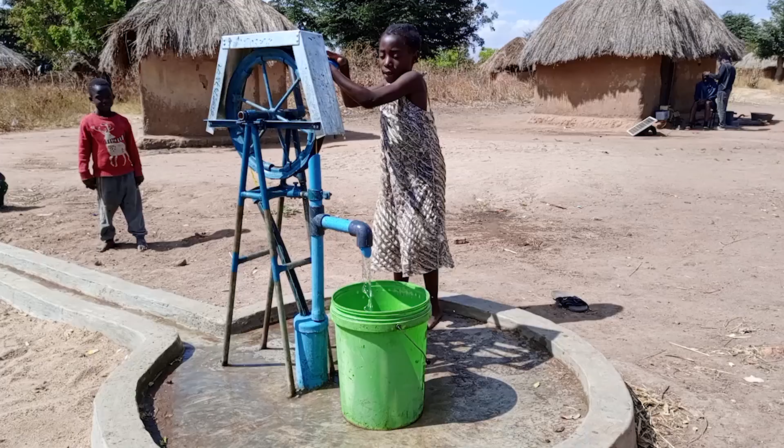This is a step-by-step tutorial on how to make a rope pump Model 1. For the production of the rope pump, the following workshop equipment and tools are recommended. For power tools you need an electric welding machine, angle grinder, and hand drilling machine.

This is an indication of the hand tools you need for construction of the rope pump. You can find the full list of hand tools in the construction manual at jacana.help/resources/water. For measuring tools, you need measuring tape, tri-square, ruler, scriber, and permanent markers.

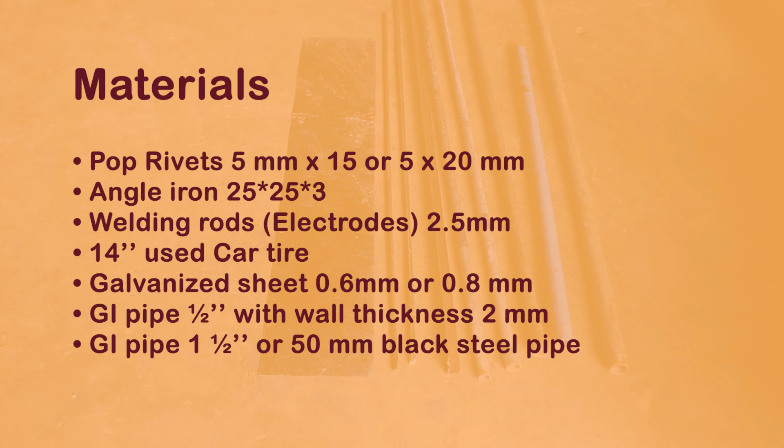This is a list of consumable materials you need. This is an indication of the materials needed for the construction of the rope pump. You can find the full list of construction materials in the construction manual at jacana.help/resources/water. To make good quality rope pumps and to produce faster, it is recommended to use production jigs.

To make a jig, first, make a part and then use that part to make the jig. This video assumes the jigs are produced. The pump structure is made with galvanized pipes to reduce corrosion. Some pipe ends must be squeezed to make welding easier. Follow the steps on how to make a pump structure.

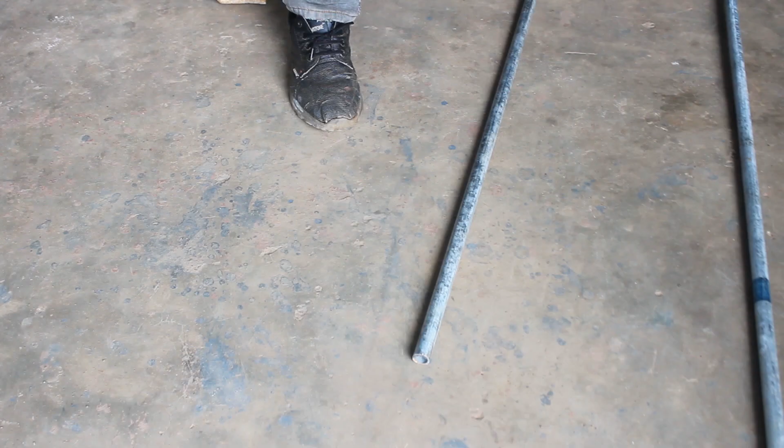Using half-inch galvanized pipe with a 2 mm wall thickness, cut 4 pieces of 950 mm length. It is advised to fix parts in a vise when cutting using an angle grinder. Using half-inch galvanized pipe with 2 mm wall thickness, cut 4 pieces of 180 mm and 2 pieces of 120 mm.

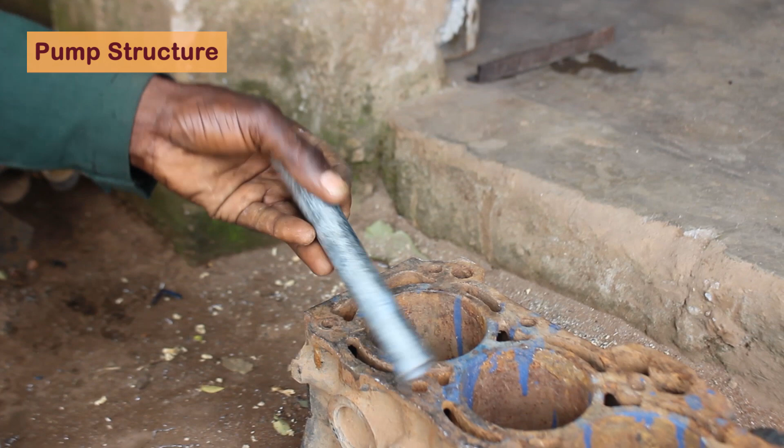Take the 4 pieces of half-inch galvanized pipes, 180 mm, 120 mm length, and hammer on both ends. Some pipe ends need to be squeezed to make welding easier. Take the 4 cut half-inch galvanized pipes of 950 mm length and make one end flat with a heavy hammer. Mark bending and drilling points using jig number 6.

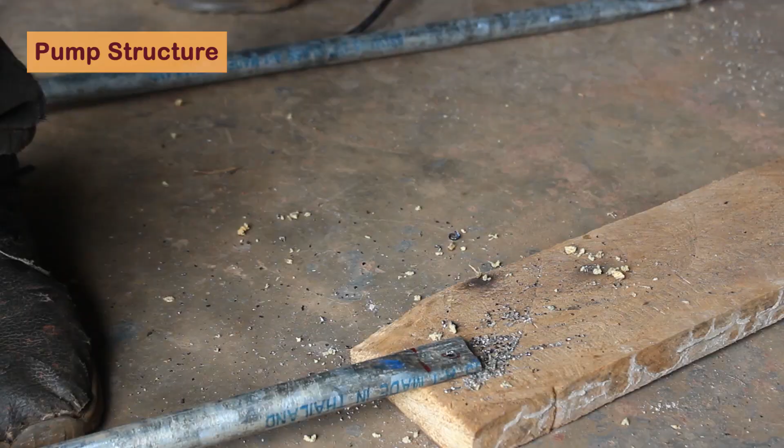Drill holes at distance of 15 mm from the end. First drill with 6 mm, then with 11 mm. Put the flat end of 35 mm in a strong vise and bend at 85 degrees.

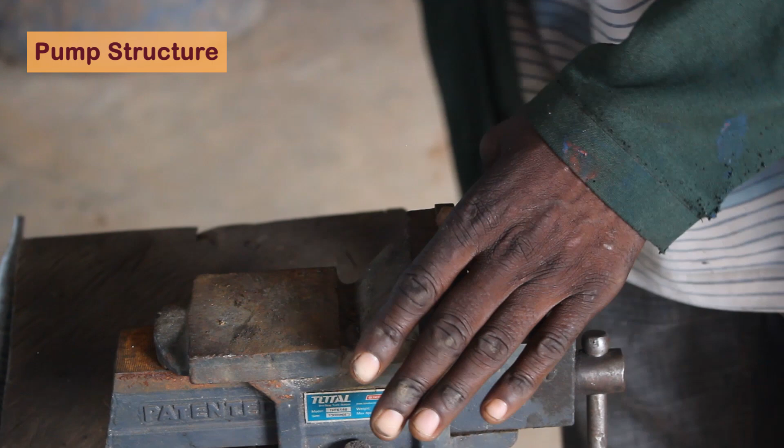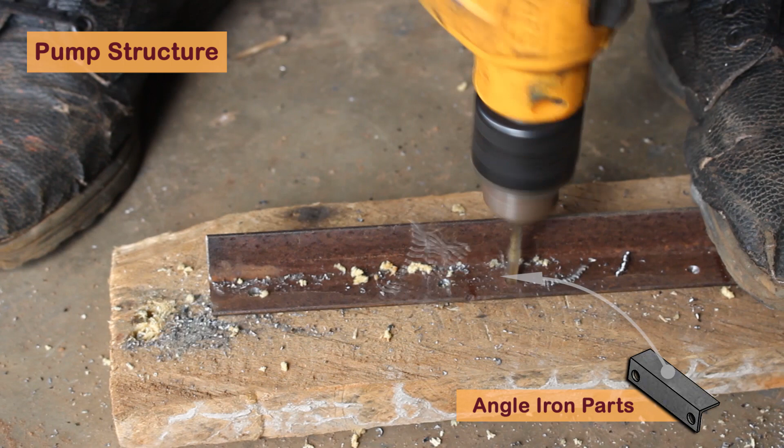Prepare the angle iron parts, drill holes in the 2 parts. Use angle profile 25 mm by 25 mm by 3 mm. It is advised to fix parts in a vise when cutting using an angle grinder.

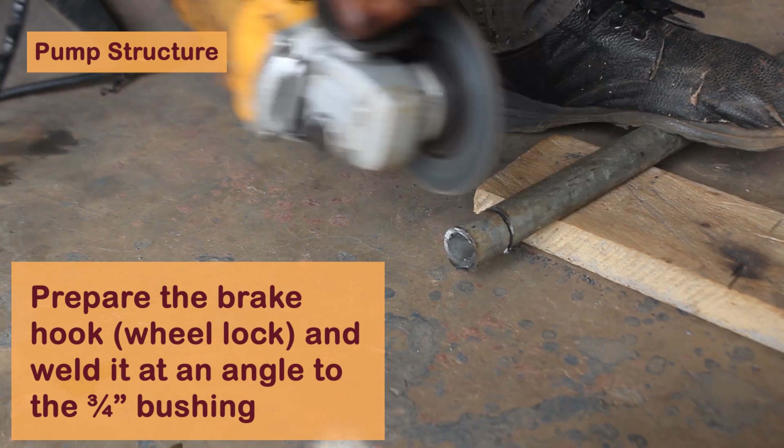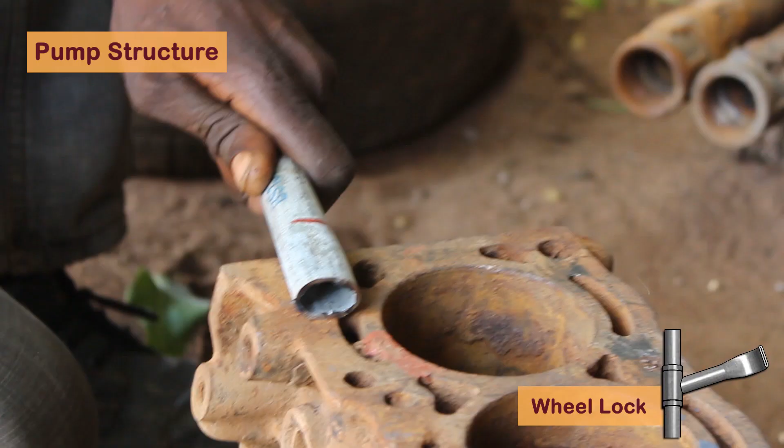Prepare the brake hook (wheel lock) and weld it at an angle to the 3/4 bushing. For the brake hook bushings, use 3/4 GI pipe with a wall thickness of 2.5 millimeters. Mark the bending point for the hook. Then hammer and make a hook.

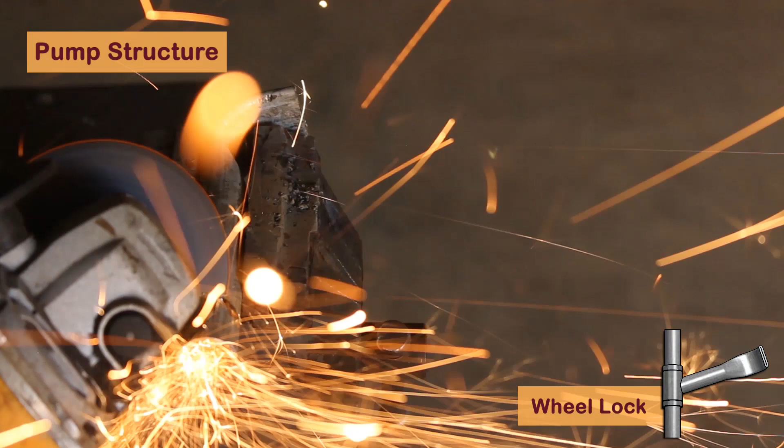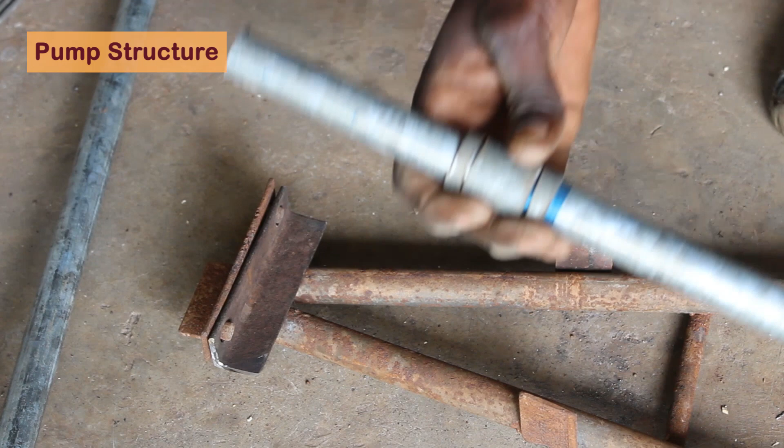Then mount the brake hook bushings to one leg. Make sure the brake hook bushings are in the right leg. Place parts in the first welding jig number 8. Tack weld the parts in place together with the angle iron part.

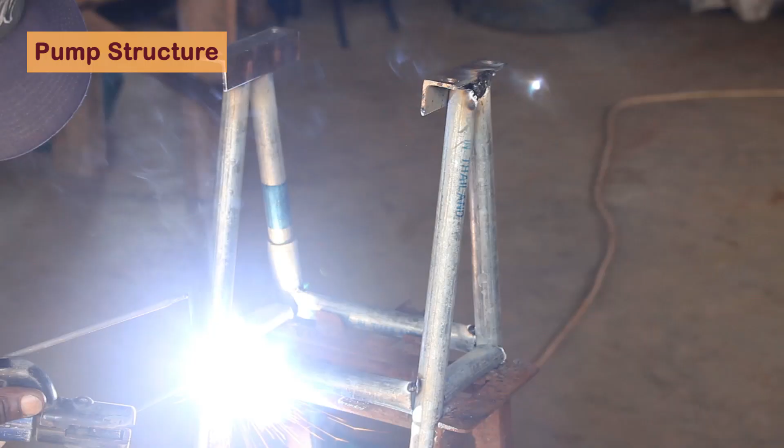Place the two sides in jig number 9 and weld all parts together with tack welds. Prepare the discharge pipe holder using 1/2 inch, 3/4 inch, and 1½ inch galvanized pipes. Prepare the first piece using 3/4 galvanized pipe with a wall thickness of 2.5 millimeters.

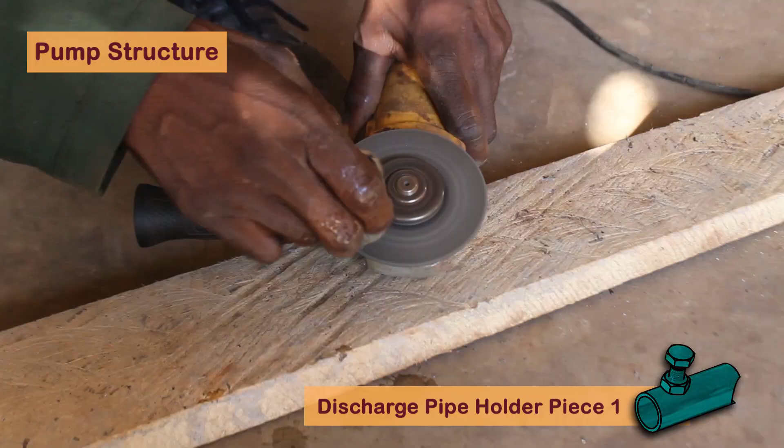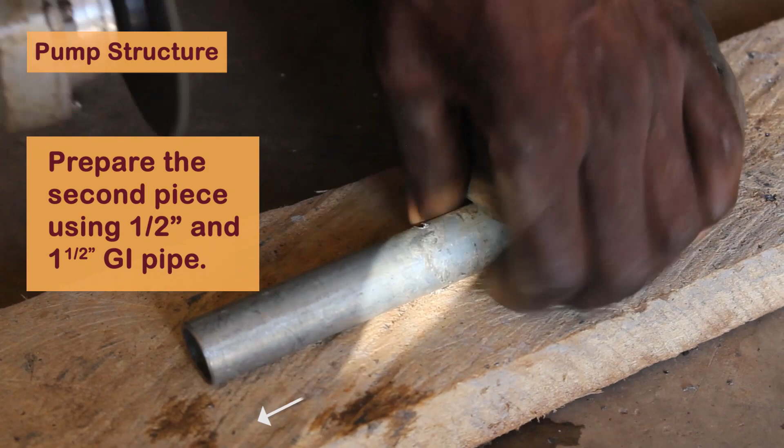Weld 1 M10 nut. Use some grease or oil to avoid bolts getting stuck by welding. Prepare the second piece using 1/2 inch and 1½ inch galvanized pipe. Use 40 mm black steel pipe with a wall thickness of 2.5 millimeters.

Prepare a 30 mm length return pipe holder using 1 1/4 steel pipe with 2.5 mm wall thickness. Tack weld the discharge pipe holder piece 1 to the pump structure.

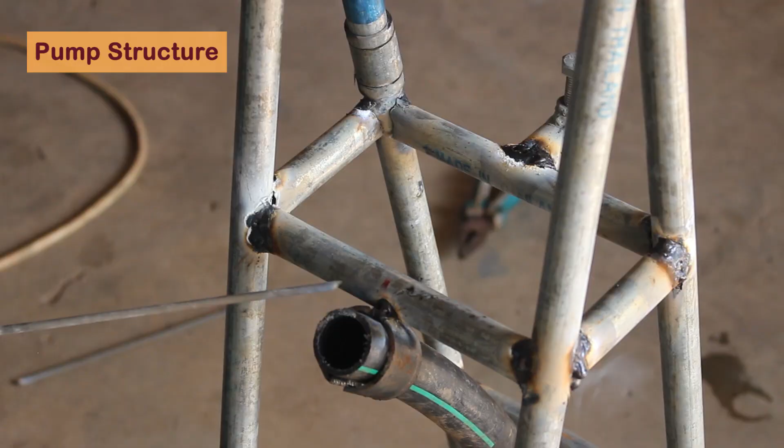Tack weld the discharge pipe holder to the pump structure. Prepare 2 angle iron parts for the cover support and drill holes for the pop rivets. Use 25 mm by 25 mm with 3 mm thickness angle iron.

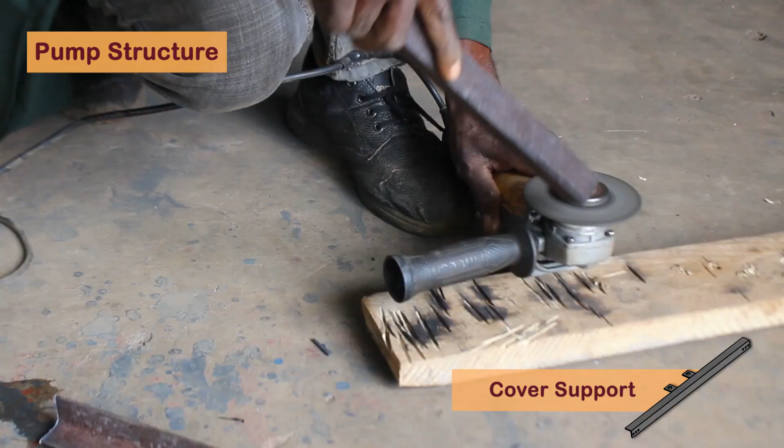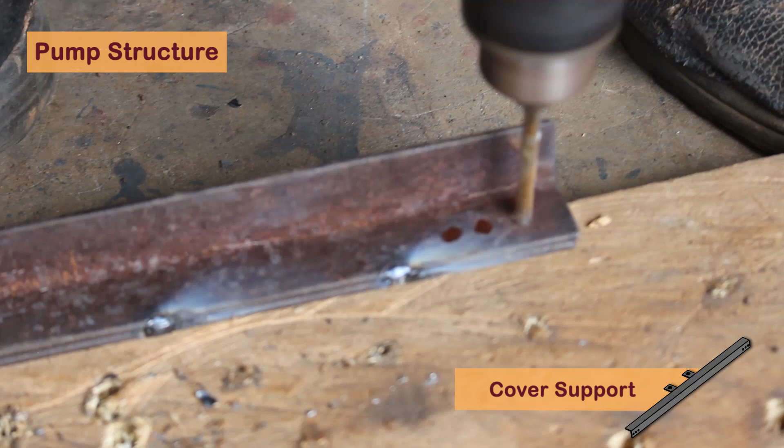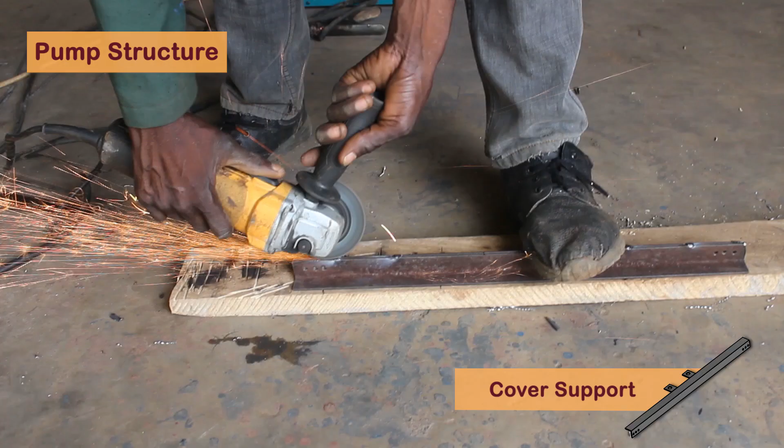Temporarily, weld the pieces together for easy drilling of holes for pop rivets. Mark and drill holes for pop rivet using a 6 mm drill bit. Weld strips for M10 bolts and nuts.

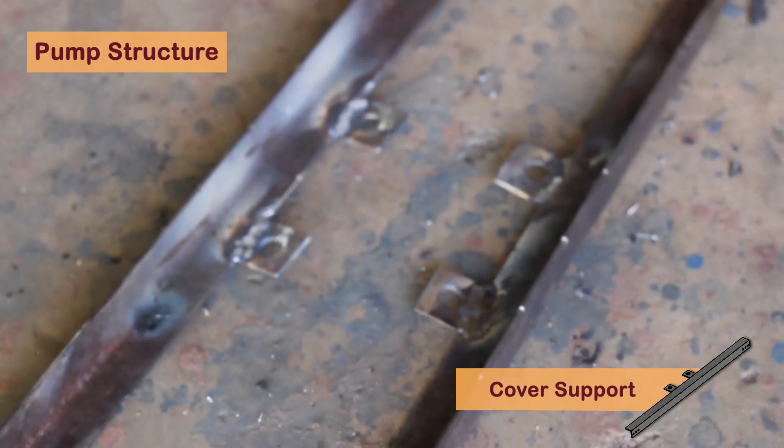The handle transfers the human power to the wheel. Due to the changing forces, the handle can break easily when poorly made or when inferior materials are used. Follow the steps on how to make a handle. Measure and cut a 3/4 galvanized pipe with 2.5 mm wall thickness on the right length.

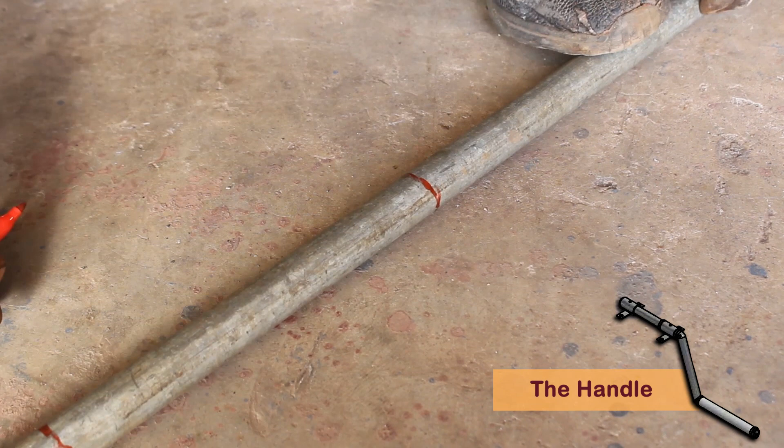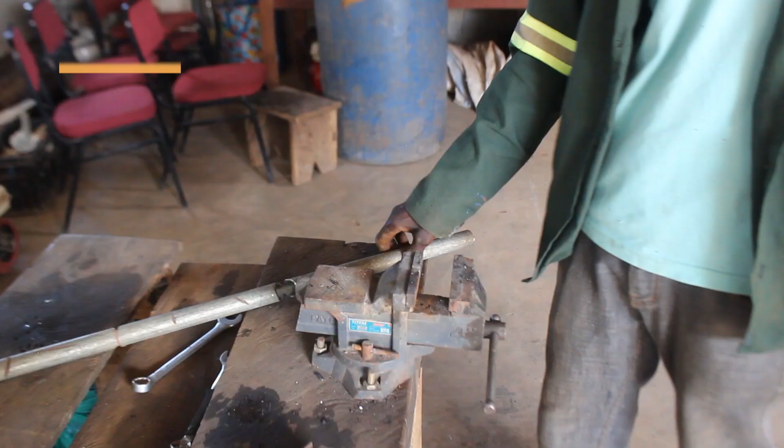Cut slots of 60 degrees where the handle will be bent. Be careful not to cut the pipe completely. Bend the pipe carefully and fit it into jig number 1. Eventually, make some adjustments.

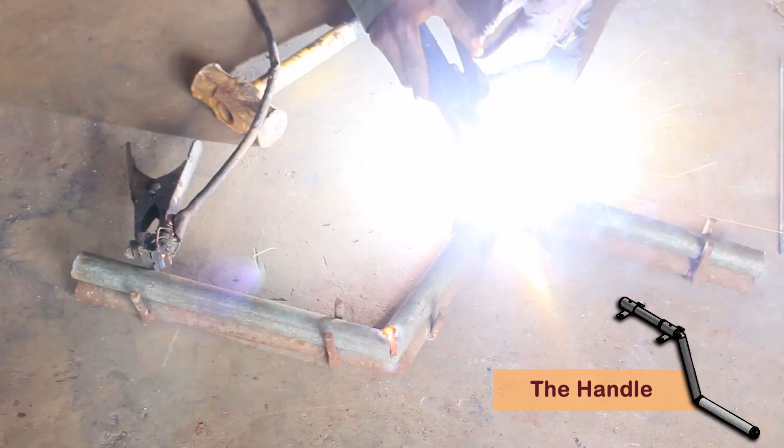Weld the cuts and make sure the cuts are totally closed, and take special care of this weld, as it is a known weak point of the pump. Remove the handle from the jig and weld the other side. The handle can break if the welds are not made well.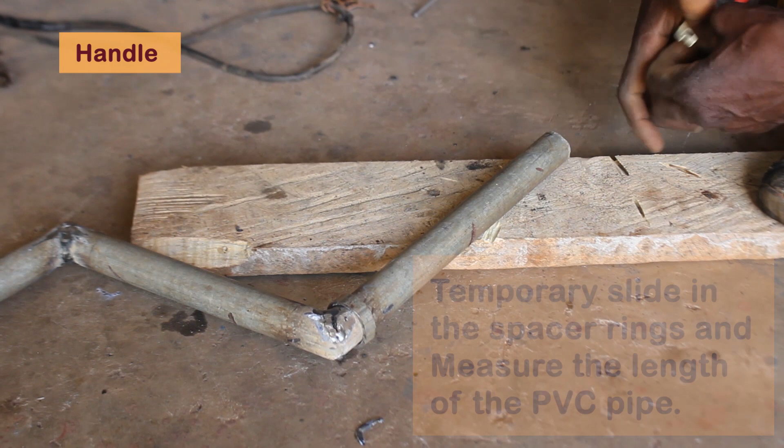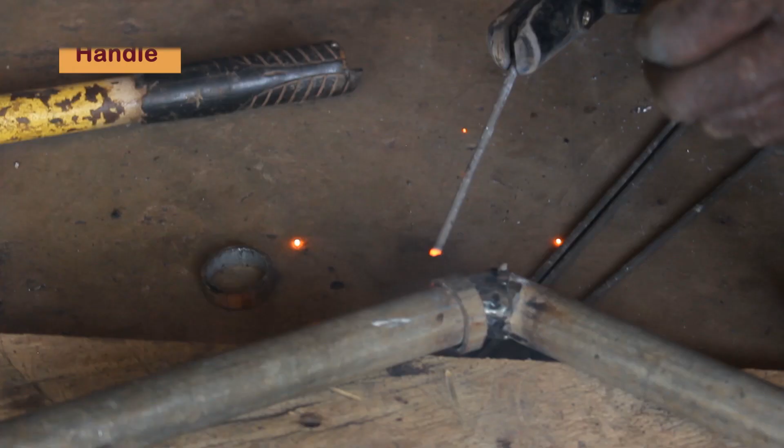Temporarily slide in the spacer rings and measure the length of the PVC pipe. First, slide a 4 mm spacer ring on the handle and spot weld. Then slide the 32 mm PVC pipe over the handle and weld the other ring to lock the PVC in position.

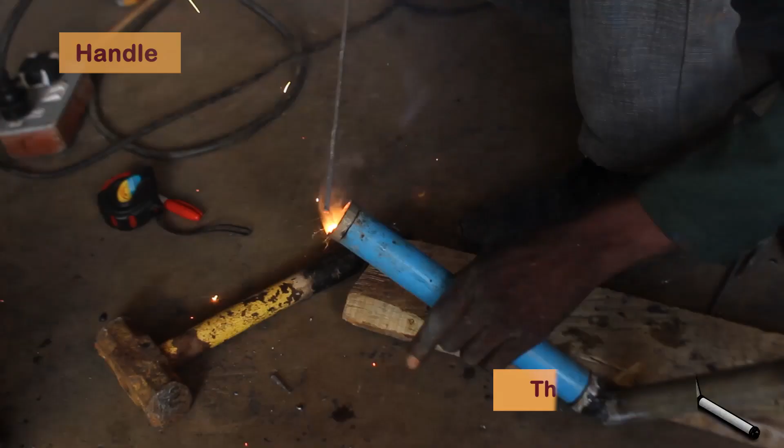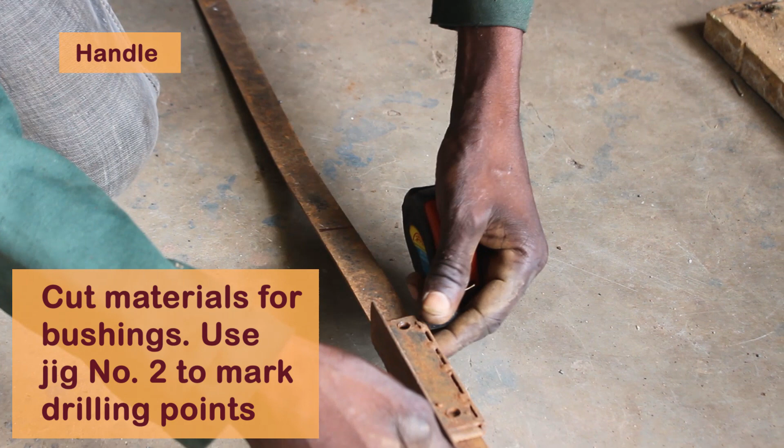Cool the welds with water to avoid burning the PVC pipe. Make sure the PVC pipe is able to rotate. Cut materials for bushings. Use jig number 2 to mark drilling points. Drill holes in strips for bushings. First use 6 mm then 11 mm drill bit.

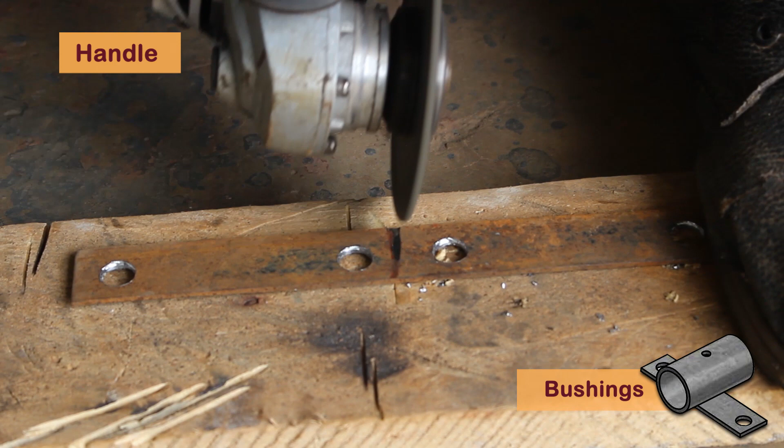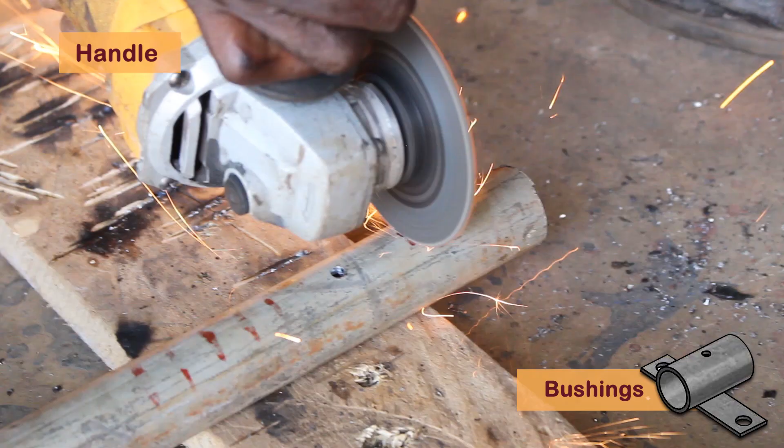Cut 2 pieces of 60 mm length using 1-inch galvanized pipe with a wall thickness of 2.5 mm for the bushings. Drill one hole on top of the bushing using a 6 mm drill bit. It is advised to fix parts in a vise when cutting using an angle grinder.

Weld the bushings to the strips. Mark the center for the bushings on the strip.

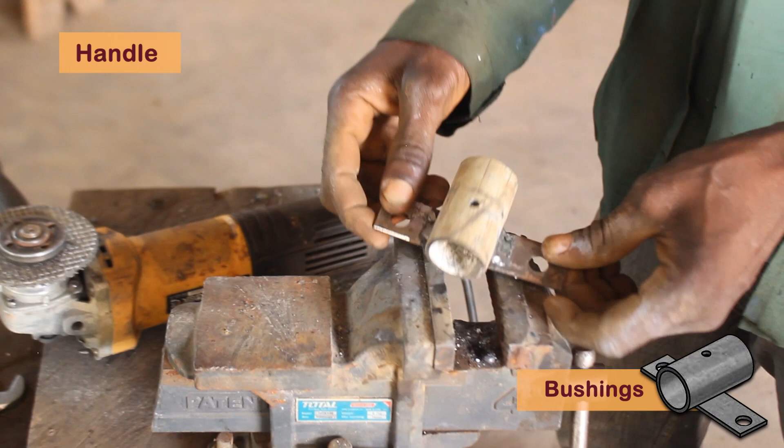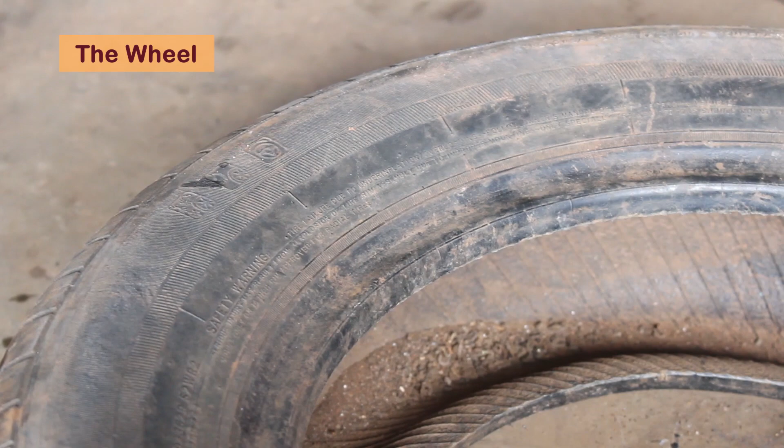Mark the 2 rings with 45mm width using a tool, a compass made of a 6mm round bar. Cut the rubber rings with a short sharp knife. Cutting may be easier by using some water.

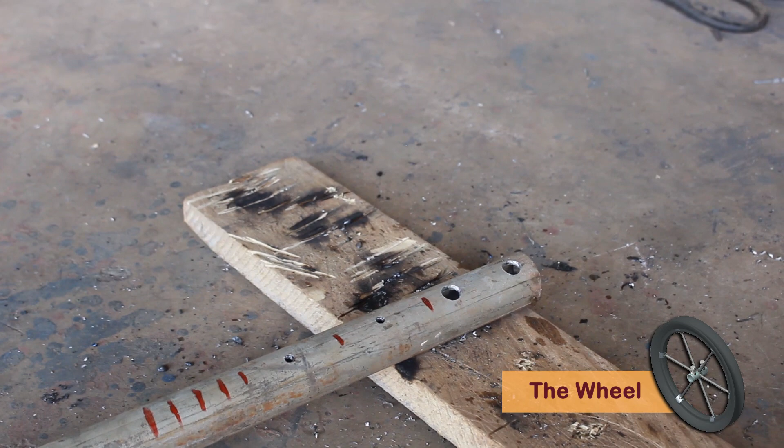Prepare the hub using 1-inch galvanized pipe with a wall thickness of 2.5 mm and drill 2 holes using a 10 mm drill bit. Mount 2 bolts to M10 nuts and weld the nuts to the hub.

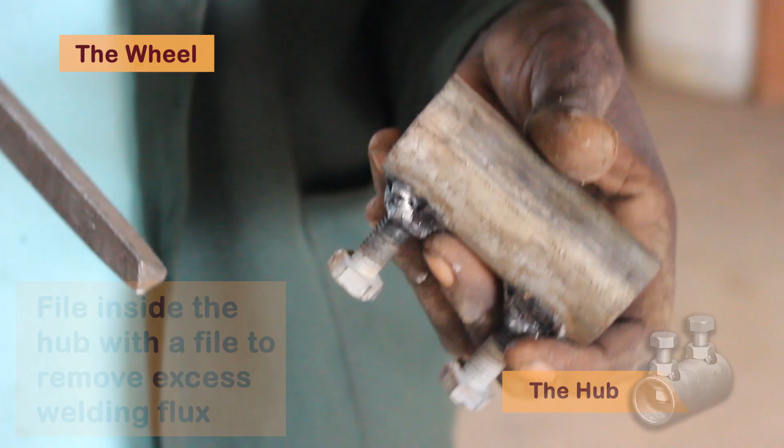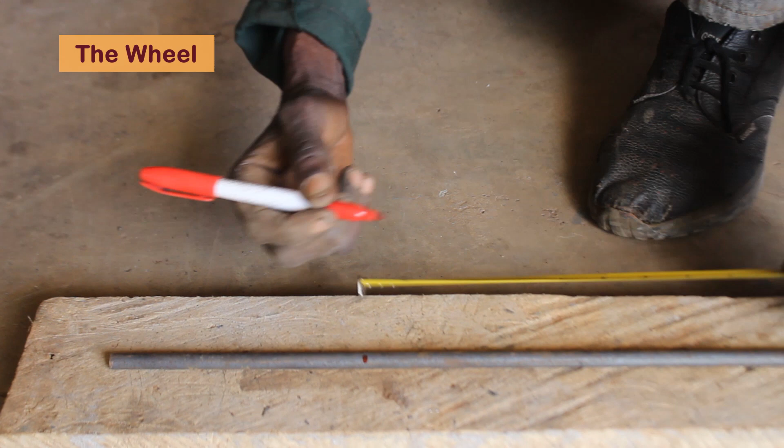File inside the hub with a file to remove excess welding flux. Cut 6 spokes using 10 mm round iron bar. Make the wheel clamps using 3/4 or 1-inch galvanized pipe with 2.5 mm wall thickness.

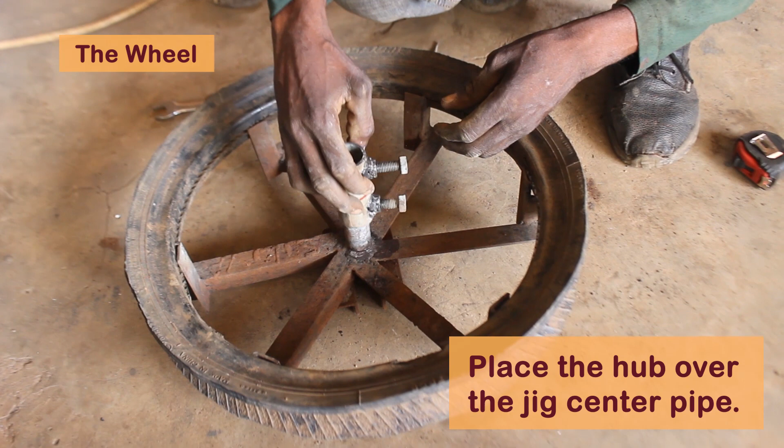Place the 2 tire parts on jig number 4. Place the 6 clamps over the tire rings. Place the hub over the jig center pipe. Screw old bolts into the nuts of the hub to protect the screw threads while welding and tighten them to secure the hub.

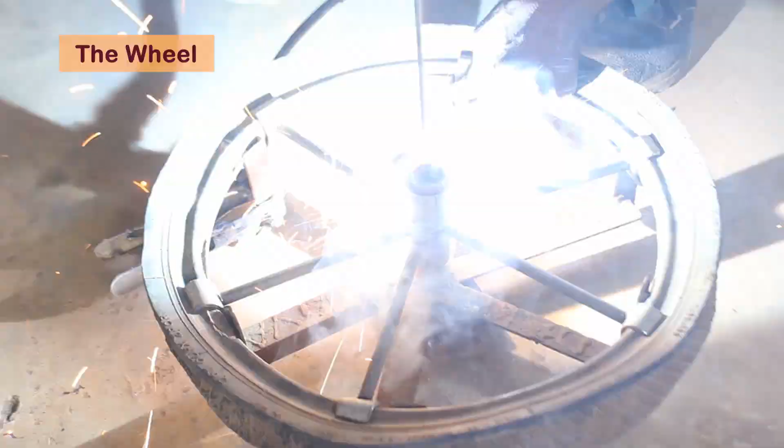Clamp the 6 spokes between the clamp and hub. Weld the spokes onto the hub. Do this only with spot welding so the spokes can be adjusted. Weld the spokes on one side onto the tire clamps. Cool the clamp directly after each weld with a small bottle with a hole in the cap, to avoid burning the rubber.

Separate the wheel carefully from the welding jig. Reinforce the wheel with more clamps. Then adjust the clamps.

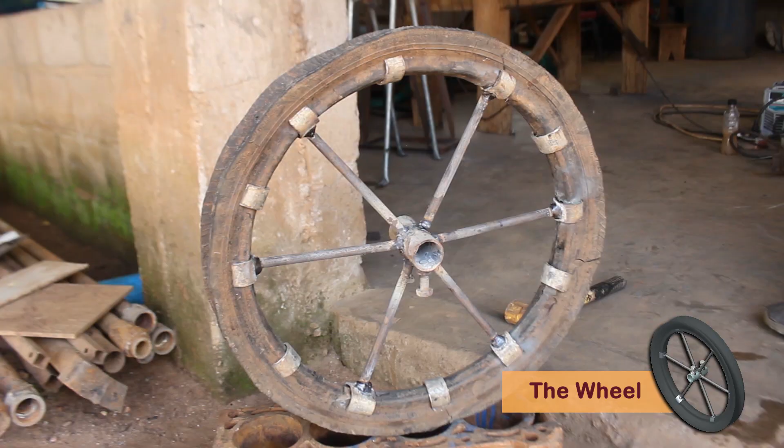The cover prevents water from splashing from the rope and also protects the rope from direct sunlight, as the lifespan of the rope will be reduced when exposed to direct sunlight. The wheel cover consists of 0.6 mm galvanized sheet metal. Before cutting, calculate and mark the most effective layout of the large metal sheet. Here are the steps to make the cover.

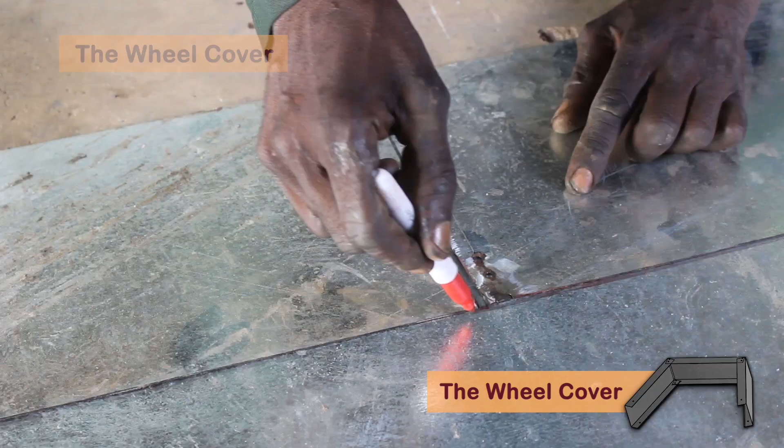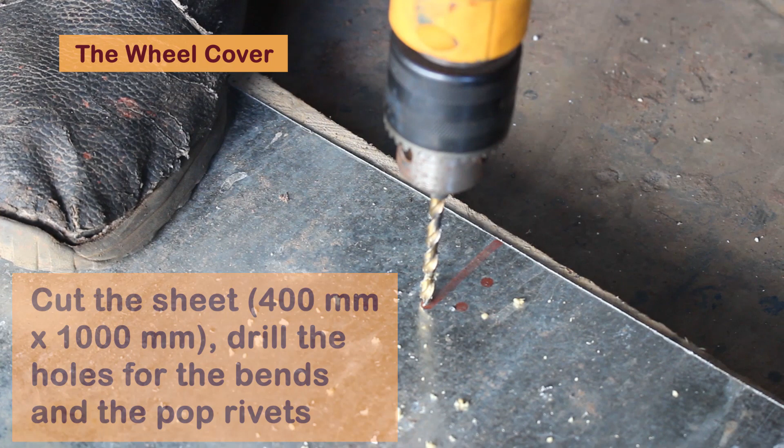Use the jig number 5 and mark the sides, holes, and position of the folding lines for the bending. Cut the sheet 400 mm by 1000 mm. Drill the holes for the bends and the pop rivets. Drill 4 holes that prevent cracks when bending the cover and make the cuts.

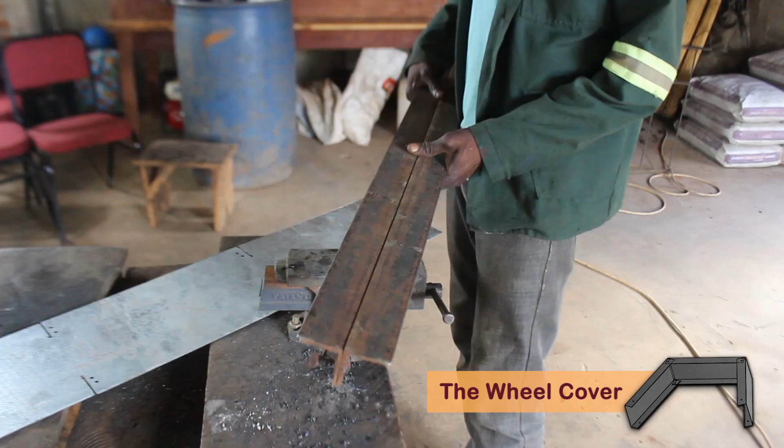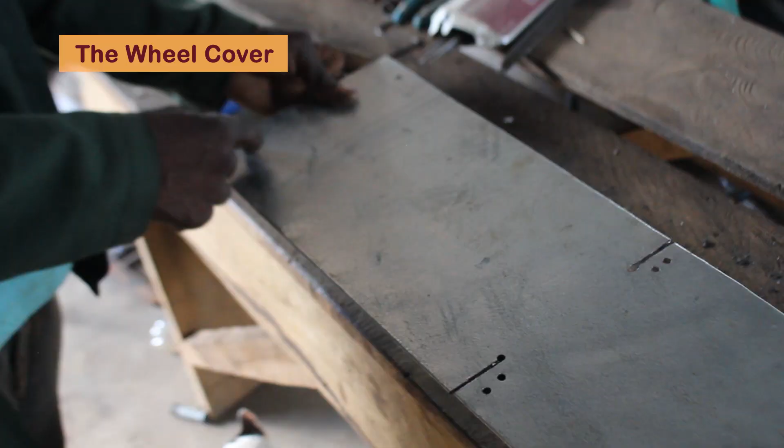Bend the 2 long sides of the cover at 7 mm. Then bend the rest of the cover in the right shape using jig number 10. Use a piece of wood and a hammer to avoid deforming the sheet.

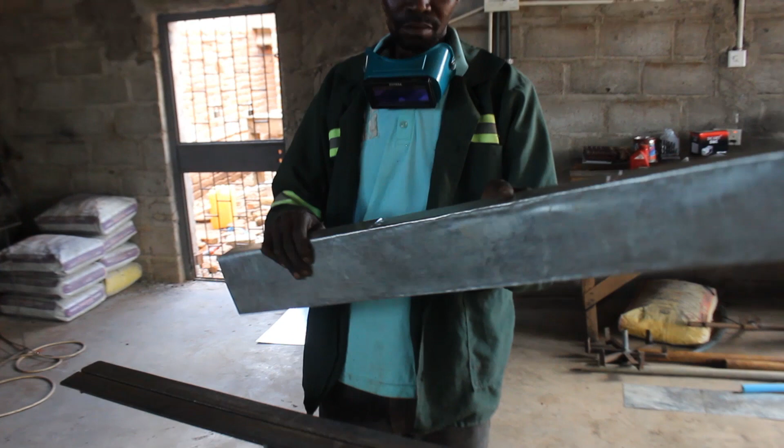The guide box guides the rope at the bottom of the well, where the rope and pistons make a turn. It has an inlet pipe with a trumpet to guide the rope coming down into the well and is fixed to the rising main. Follow the steps on how to make a guide box. Cut 2 pieces of 150 mm length using 1/2 inch galvanized pipe with 2 mm wall thickness and hammer to make them a bit flat.

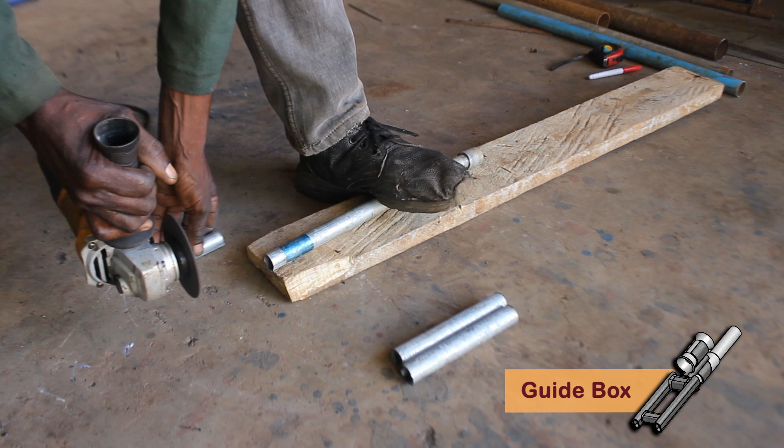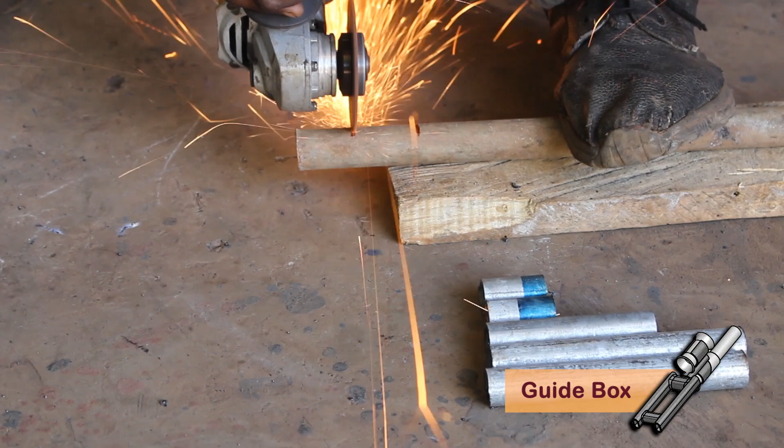Then cut 2 pieces of 40 mm length using 3/4 galvanized pipe with 2.5 mm wall thickness for the rising main and return pipe. Hammer to make them a bit flat.

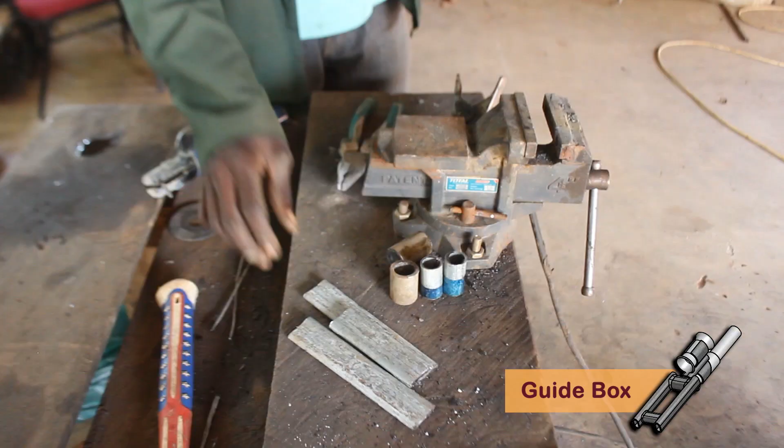Assemble all the parts together and weld. Make sure the welding is smooth on the bottom of the guide box to avoid damaging the rope when rotating. If possible, sand the guide box. Cut a 30 degree angle at the top of the 40 mm length pipe for the rising main pipe holder to make sure the rising main pipe cannot turn and twist the rope.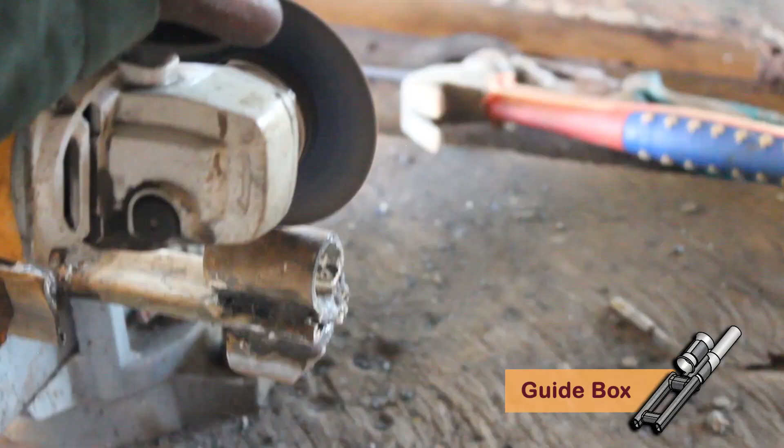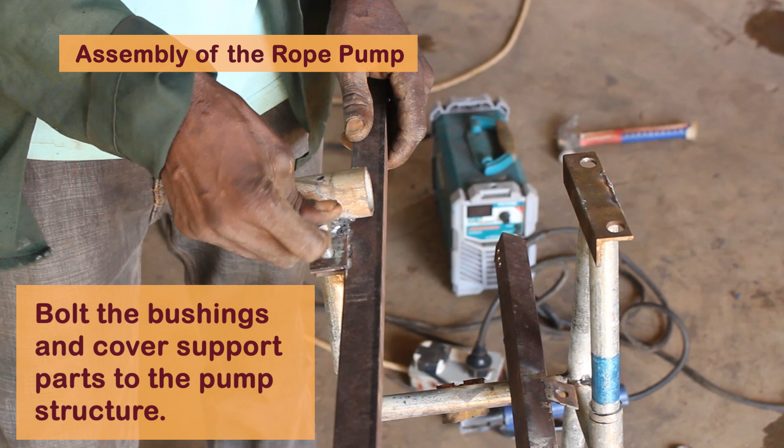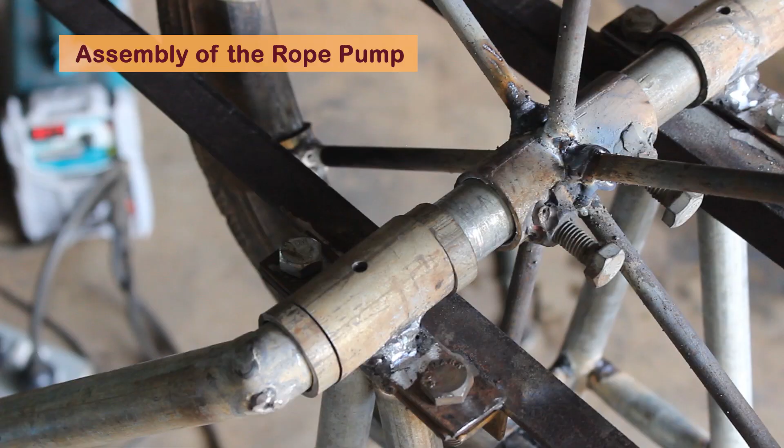Bolt the bushings and cover support parts to the pump structure. First, slide the 7 mm length spacer rings to the handle and assemble the wheel and handle on the pump structure. Make sure the wheel is well centered between the two bushings. Weld the 7 mm spacers to the handle.

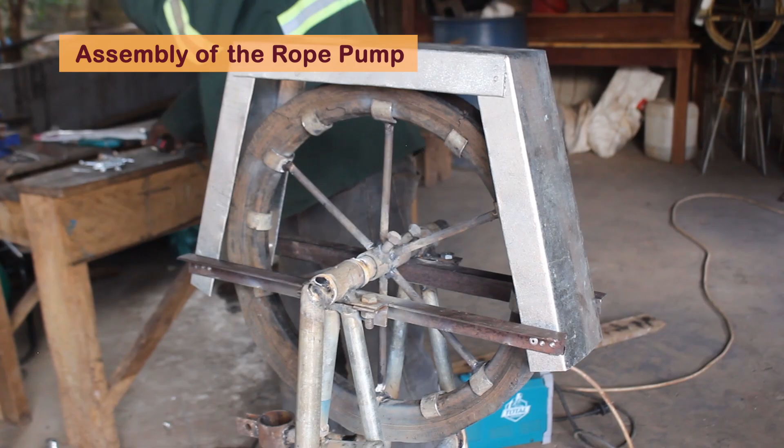Weld the brake hook to the pump structure at an angle. Install the cover on the pump structure and clamp it in place to the cover support. Use the measuring tape to center the cover in position. Drill holes in the cover for the pop rivets and clamp the cover in position.

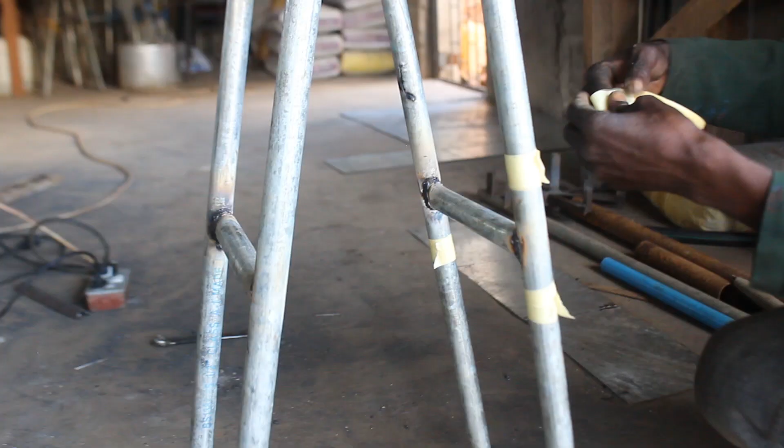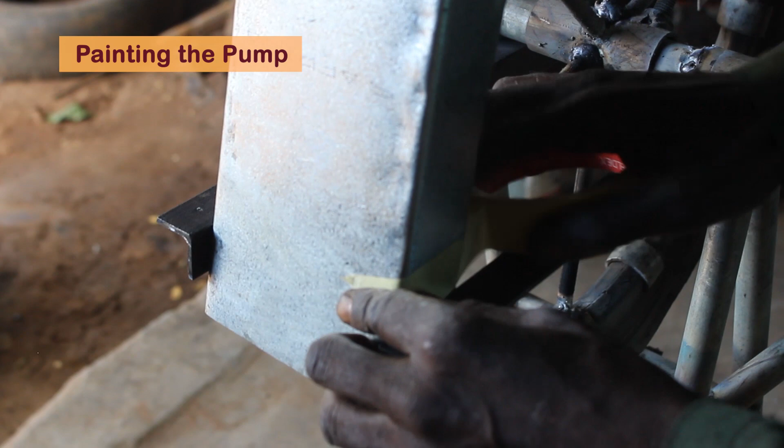To avoid corrosion, it is essential to paint the whole pump or the black steel parts and the parts that are galvanized but are welded or damaged. Cover the parts which are not supposed to be painted with masking tape. Before painting, make sure you remove rust and treat all parts to be painted with sandpaper. Make sure that your hands are free of grease.

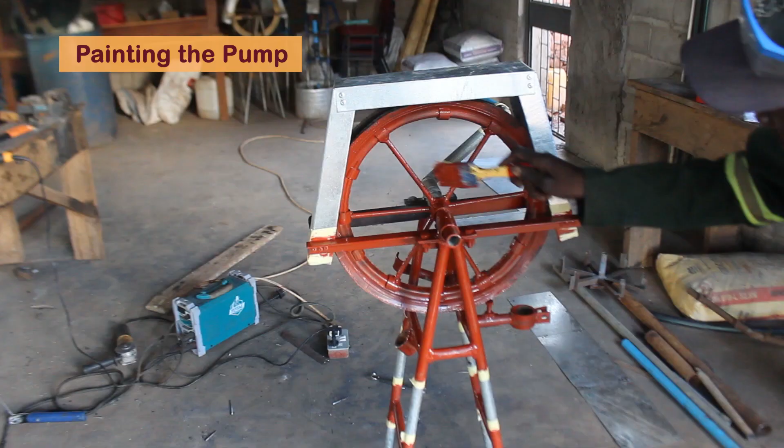Paint all parts with anti-rust paint, red oxide. Be sure that welds are painted well. Let painted objects dry in the shade, not in the sun. When the anti-rust is completely dry, make sure hands are free of grease when moving the object. Paint with the final paint, blue glossy paint, and allow painted objects to dry in the shade, not in the sun.

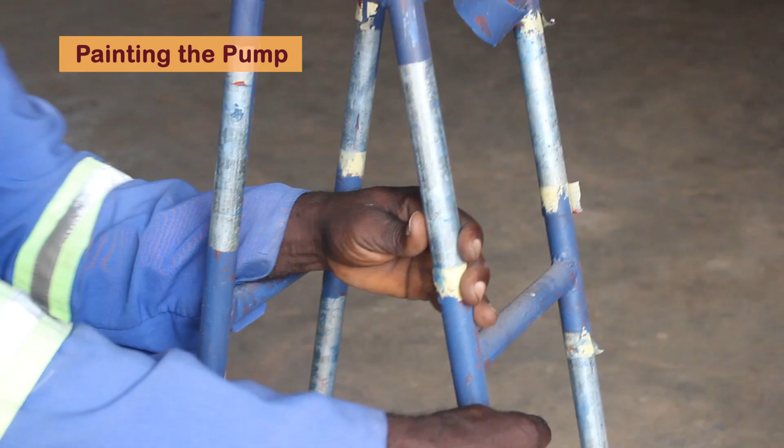The pump is now ready for installation. Watch the next video on how to install a rope pump on a borehole or an open well.